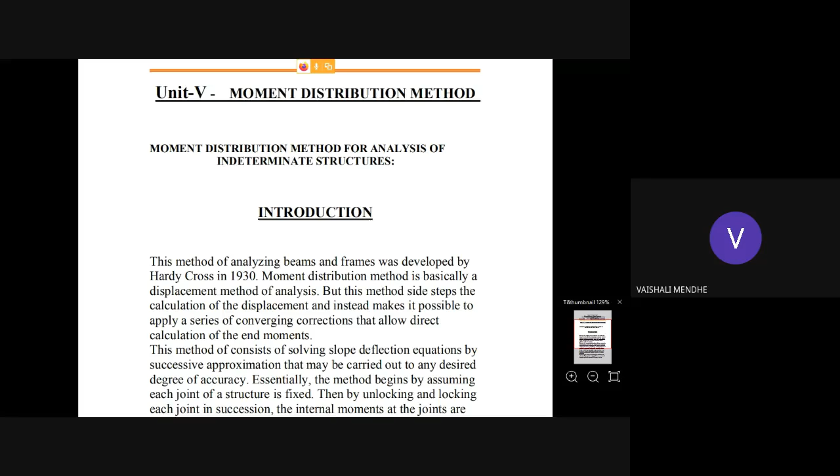I'll just go with the introduction part. You already know the method and process of the moment distribution method; there's just an inclusion of one extra step for the sway analysis. This method is useful for analyzing beams and frames, but in this unit we are only going to study the analysis of frame.

It was developed by Hardy Cross in 1930. It is basically a displacement method of analysis, but this method sidesteps the calculation of displacement and instead makes it possible to apply a series of converging corrections that allow direct calculation of the end moment.

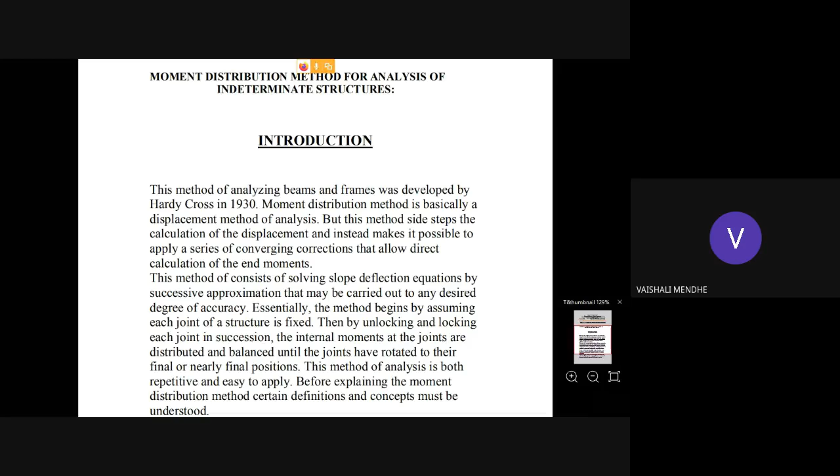We are finding out the end moments using this moment distribution method, so we can say it is a joint to joint method. This method consists of solving slope deflection equations by successive approximation that may be carried out to any desired degree of accuracy.

Essentially, the method begins by assuming each joint of the structure is fixed. Then, by unlocking and locking each joint in succession, the internal moments at the joints are distributed and balanced until the joints have rotated to their final or nearly final position.

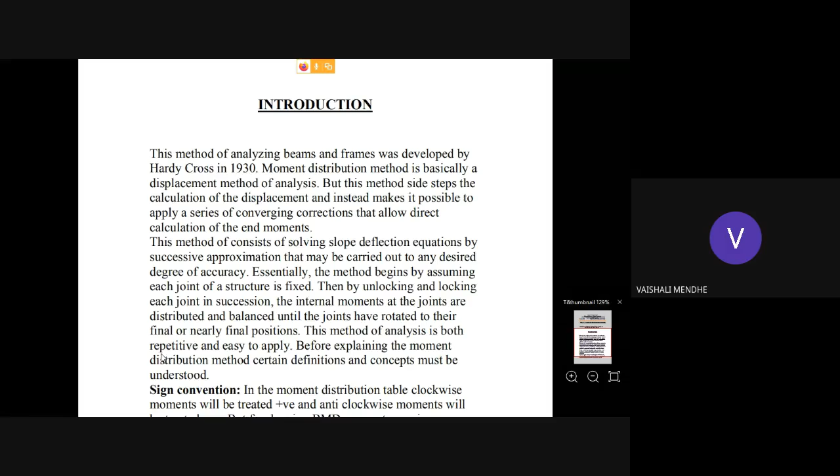So when we go to see the problems, we know the method, we know the steps, how the joint is to be balanced and how the moment is to be carried out, whether it is a hinge support or a fixed support, and accordingly we find out the final positions, meaning the final moment. This method of analysis is both repetitive and easy to apply.

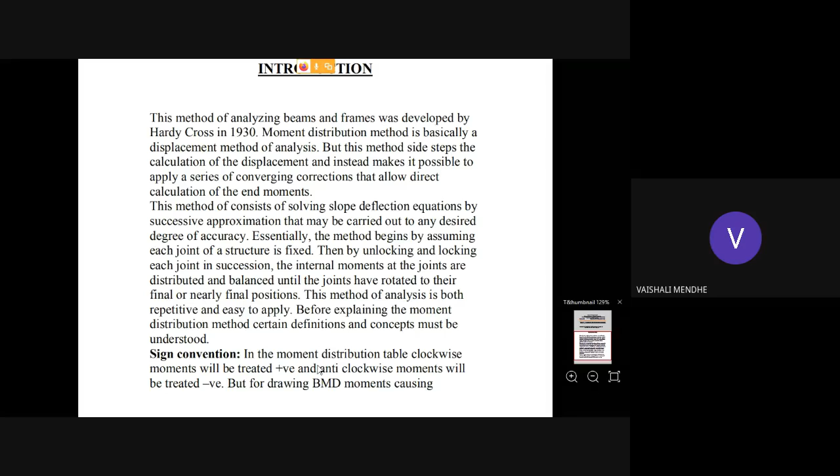Before explaining the moment distribution method, I will explain the analysis of sway frames. Certain definitions and concepts must be understood. As you know, regarding sign conventions, we consider clockwise moments as positive and anti-clockwise moments as negative.

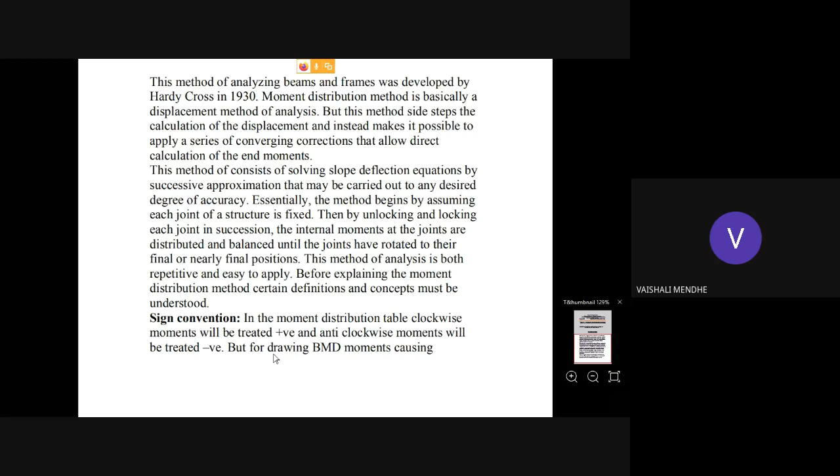This sign convention is generally used, but for drawing bending moments, causing concavity upward, that is sagging, will be treated as positive, and moment causing convexity upward, that is hogging, will be treated as negative. Again, while analyzing any structure using this method, you should know the fixed end moment.

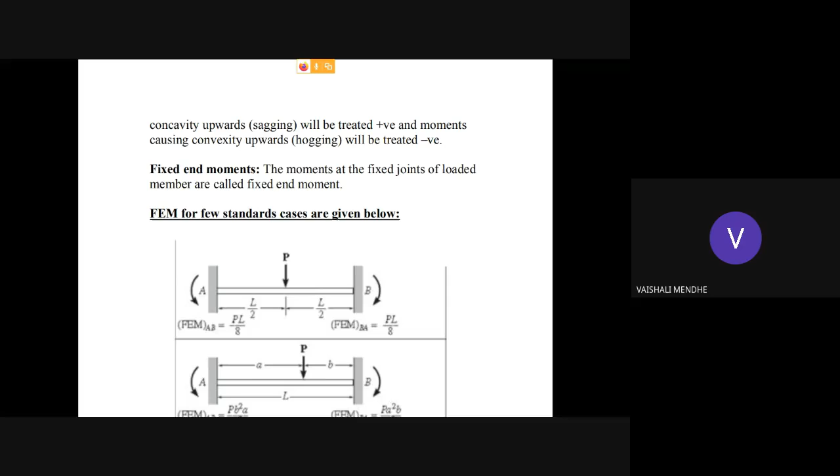So here I have listed some fixed end moments. You know the definition of fixed end moment: the moment at the fixed joints of a loaded member is called the fixed end moment. So you have some cases where you should know the fixed end moment for that case.

For some standard cases, if the load is acting exactly at the center, if the load is not at the center, if there is a uniformly distributed load, if there is a varying load - because when we solve problems of frames or beams, there may be any type of loading. So every time we carry out the analysis of any structure using this method, the first step is always to find out the fixed end moment of your members.

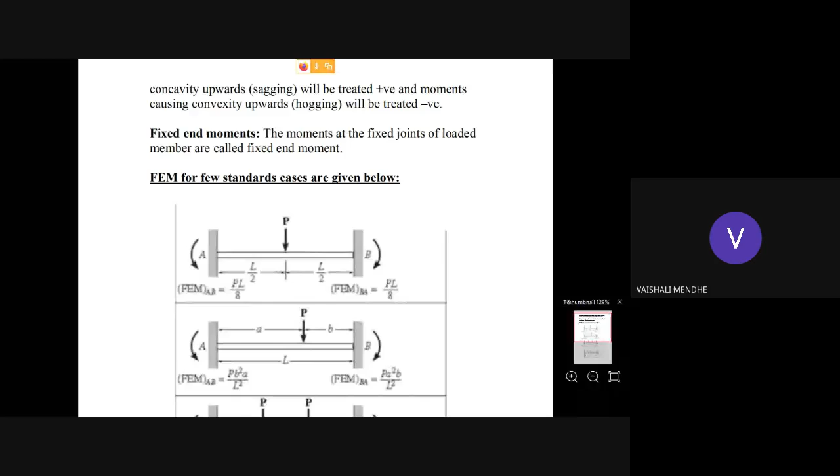That depends upon which type of loading is acting on your structure. So here I have given the fixed end moment for some standard cases, and you are very much familiar with this, you know this.

Okay, only you have to learn this, to find out the fixed end moment of any member. So here you can see that load is exactly at the center.

So fixed end moment AB is anti-clockwise and fixed end moment BA is clockwise. Anti-clockwise we are considering minus and clockwise we are considering plus. So this is minus PL by 8, plus PL by 8.

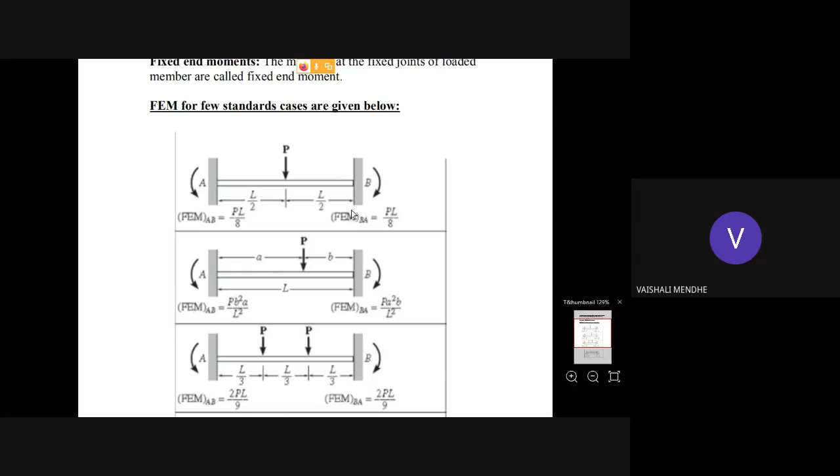Okay, so some few cases I have listed here. Here you can see that load is not acting at the center. So fixed end moment AB is WAB square by L square, and WA square B by L square.

If there are 2 loads at the center, you can use this formula: 2PL by 9 minus, and this is plus 2PL by 9. Or you can go with fixed end moment AB WA square B square by L square plus WAB square by L square, and fixed end moment BA WA square B by L square plus WA square B by L square, like that you can do it.

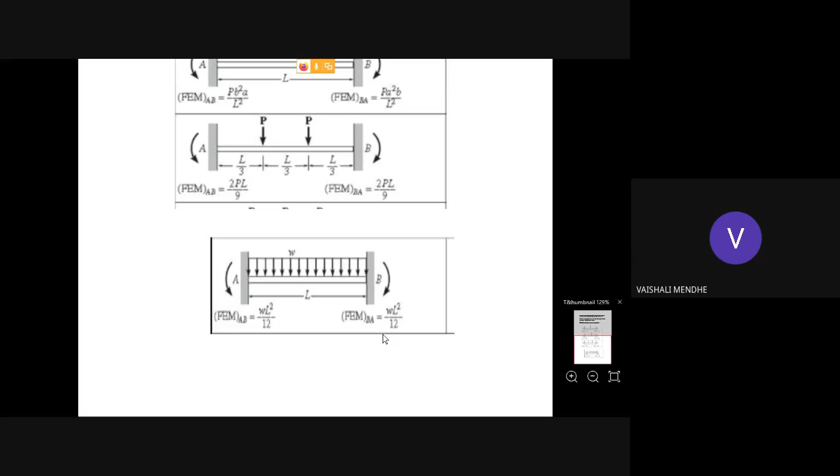Or if there is a uniformly distributed load, you can see it is WL square by 12, WL square by 12, minus plus. Then there may be this type of loading also on your structure, uniformly varying load.

So this fixed end moment AB is minus WL square by 20, and fixed end moment BA is WL square by 30. And for the last case, this is also the uniformly varying load.

So here you can see the fixed end moment AB is 5 WL square by 96, and fixed end moment BA, it is plus, and AB is minus.

So these are some of the cases you have to keep in mind for finding out the fixed end moment. Generally there will be point load, uniformly distributed load, uniformly varying load also, and also there will be moment at the end A, or at the center also. That I have not included here.

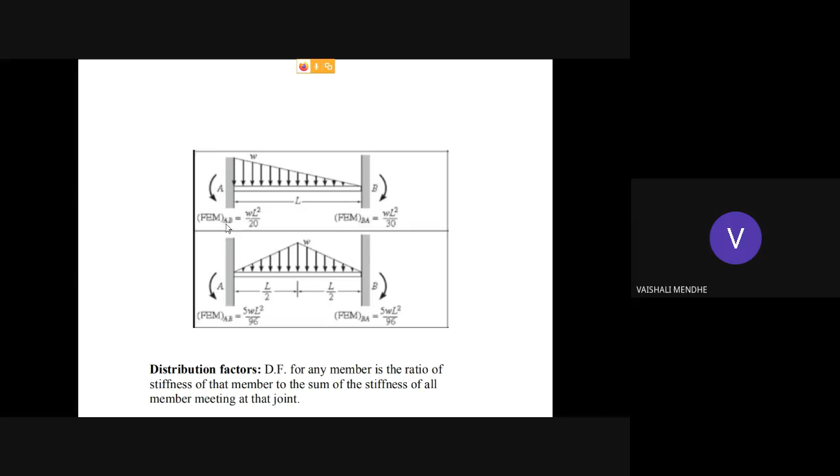But you can search it from any book, or from the net, and just write down that if there is a clockwise moment at A or B, or an anti-clockwise moment, then what will be the fixed end moment AB and fixed end moment BA.

So then I am going to repeat these things because already you know this method and you know about the distribution factor and the stiffness factor, so I'll not focus more on this. Just I will tell you how the distribution factor is to be calculated and how the stiffness factor is to be calculated, because this distribution factor is based on the relative stiffness factor.

So this distribution factor for any member is the ratio of stiffness of that member to the sum of the stiffnesses of all the members meeting at that joint. So we are considering the joints, and at the joints how many members are connected to that joint, we are just adding that, we'll get the summation K.

So this K in general, the distribution factor, it is equal to K by summation K. So this formula you have to keep in mind, that is K by summation K. K is the relative stiffness of that particular member, and summation K is the sum of the stiffness of all the members meeting at that joint. Whatever members are connected to that joint, you will just add the stiffness, so that will give you the value of summation K.

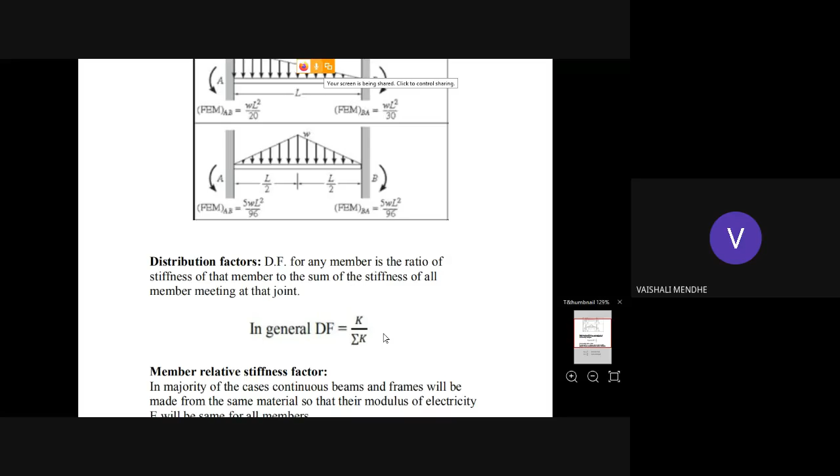So this formula also you have to keep in mind, K by summation K, and the distribution factor addition of this is always equal to 1. Then the relative stiffness factor is denoted by K.

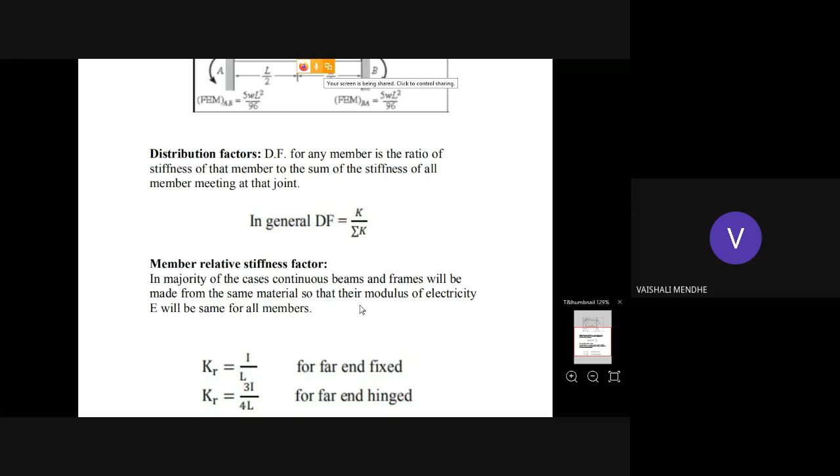In majority of the cases, continuous beams and frames will be made from the same material, so their modulus of elasticity E will be same for all the members. This also you have to keep in mind, that if the end of the member is fixed, K can be calculated as I by L.

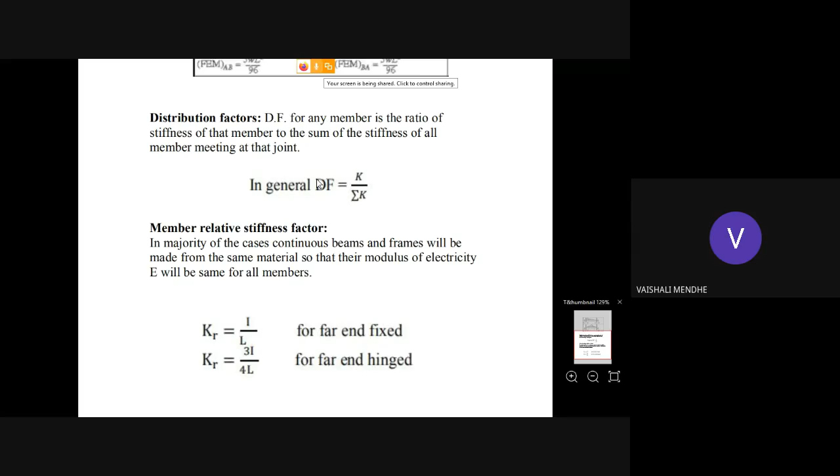Okay, it is calculated by I divided by L, where I is the moment of inertia. If the far end is hinge or roller supported, or continuous, and for fixed end, K will be considered as I by L. For hinge end or roller supported, K will be considered as 3 by 4 into I by L. So these two formulas you need to keep in mind to calculate the relative stiffness factors, which is denoted by K. Once you get this value of K, then you can find out the distribution factor. So these are the terms we are going to use in this moment distribution process.

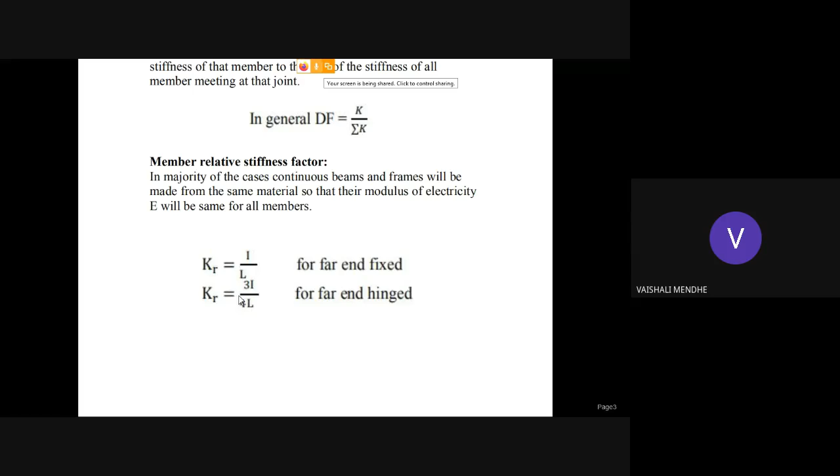So you just try and understand about the sway frame. What exactly is the sway frame? It is sway frame, or we can say it is a side sway. So how this moment distribution method is applied for frames with side sway, that analysis how it is to be carried out, we will see one by one. First of all, you just understand the meaning of the sway frame.

Frames that are not symmetrical with reference to material property or geometry, like different lengths and the I values of the column. If the I values are different and the length is different, material property is also different, and which is non-symmetrical, or support conditions are not same, length is different, or subjected to non-symmetrical loading, meaning loading will not exactly be at the center of your member.

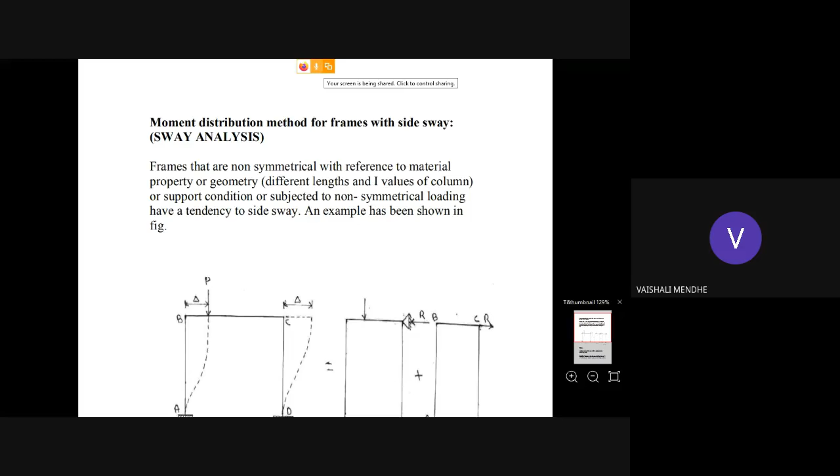So these are all the properties we can say that will make the frame a sway frame. Length can be different, I values of column can be different, support conditions also different, or the main thing is that if the loading is subjected to non-symmetric loading, which has a tendency to side sway, that is called a sway frame.

So this example I have given here, you can see this figure. An example has been shown in this figure. In first figure 1a, you can see that the frame is there where the end conditions are same, column lengths are same, but you can see here this load P is not a symmetric load. We can say P is acting at 1 meter from B and 3 meters from C. It is not exactly symmetric force.

So that also will be the responsible factor for the frame to have a sway. There will be a sway as the load is applied - there may be vertical loading also, or there may be horizontal loading also. So you can see this force P, it is not symmetric. Due to that unsymmetric loading, there will be chances of sway frame.

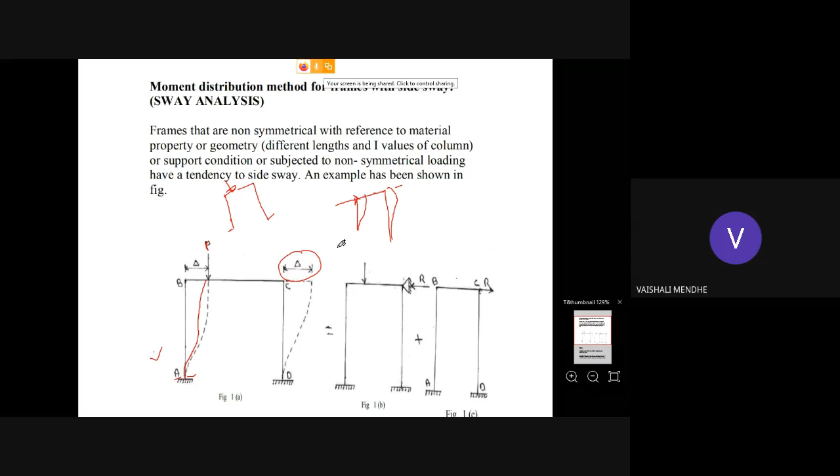So first of all, you should understand the concept of how it is to be solved.

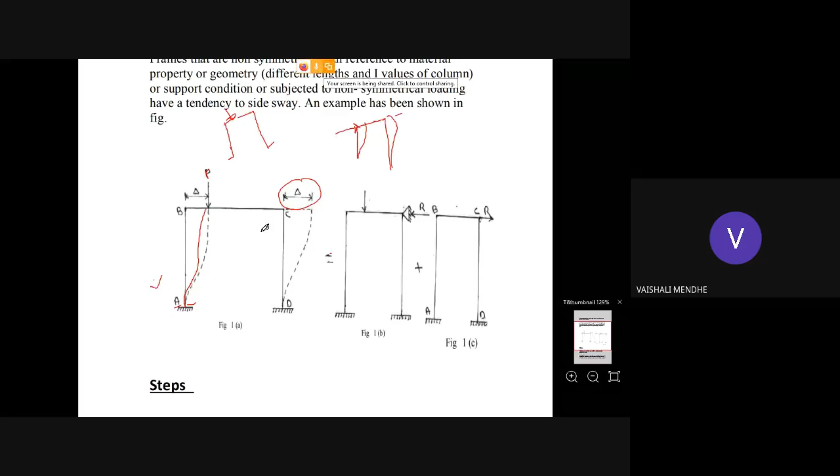Analysis of such frames will be carried out in two ways. First, the actual frame will get divided into two frames. The first analysis will be carried out as a non-sway analysis, and the second will be carried out as a sway analysis. First I will explain how the analysis is to be carried out, and then I will move to the figure to show how it is divided into two parts.

We can see that the analysis of such frames means sway frames. Whatever analysis we carry out in this unit, we are going to carry out only frame analysis, and only considering the sway frame. We are not considering the non-sway frame, because non-sway frame analysis is very simple. What extra do we have to learn in this subject? We have to analyze the sway frame using this method.

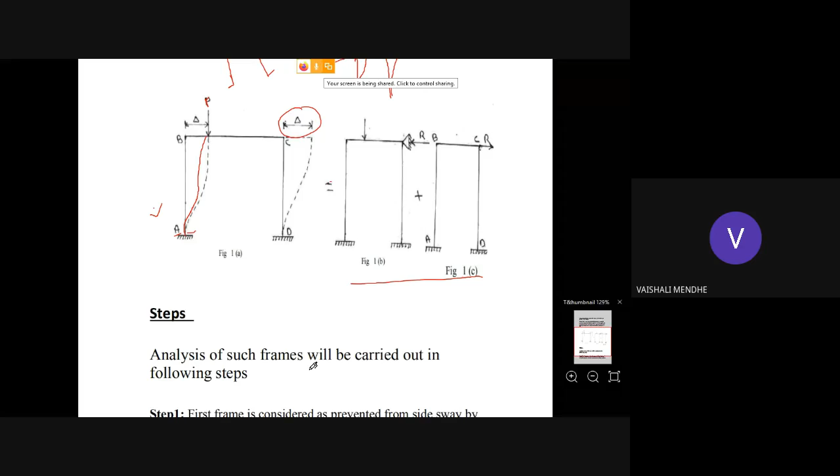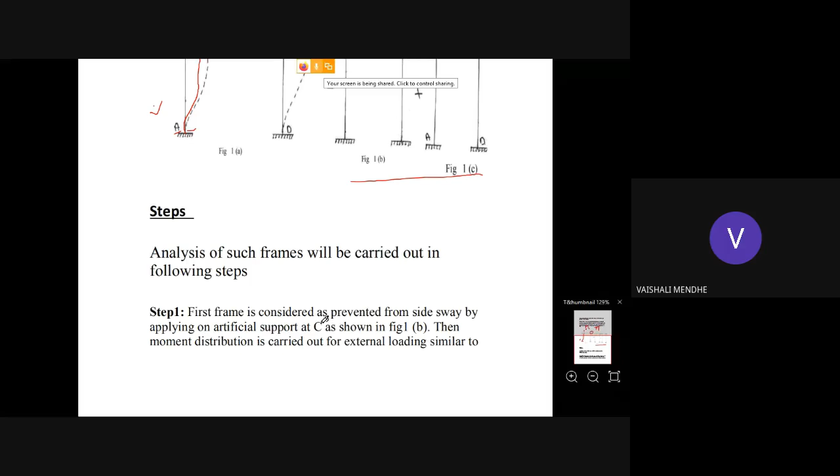So analysis of such a frame will be carried out in the following steps. Just try to understand the steps. First, step 1: the frame is considered as prevented from side sway by applying an artificial support at C as shown in figure 1b. You can see this figure. First, the frame is prevented from side sway.

Whatever the actual frame given to you, that will be your sway frame, and the external loading will act on that frame. But as we have to analyze this frame as a sway frame, first you have to carry out the non-sway analysis, then you have to carry out the sway analysis.

So the final moment you will get is your non-sway moment plus sway moment, and to that sway moment we are applying a correction factor, because non-sway analysis is carried out only for the external loading. Whatever external load is acting on the frame, only for that the non-sway analysis is carried out. But sway means displacement. How much displacement are we assuming? We are assuming delta.

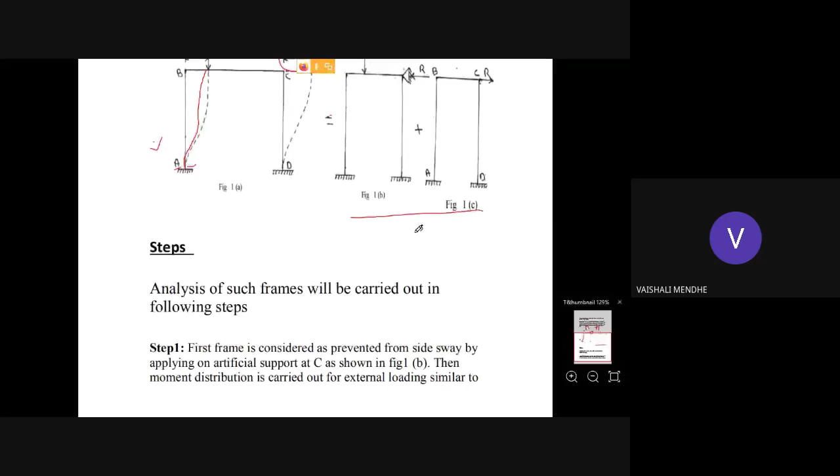Both these effects will not be considered together. We cannot consider the external loading plus displacement together. So in what way is it to be analyzed? First, we are considering the actual frame as a non-sway frame. Then how will we consider it? Because the frame is a sway frame.

As you can see here, this is the actual frame, and this actual frame is to be divided into two parts. So your first frame will become a non-sway frame. First frame will be non-sway frame, but actually the frame is a sway frame. But when it becomes a non-sway frame, we have to prevent this frame from sway by providing the artificial support at this level, at C.

As you know, a non-sway frame means if there is an artificial support at the beam level, the frame is called a non-sway frame. So as the frame is a sway frame, first we have to go for the non-sway analysis, considering the actual frame as a non-sway frame by applying the artificial support at C as shown in figure 1b. If we provide this artificial support at C, the frame will be prevented from sway.

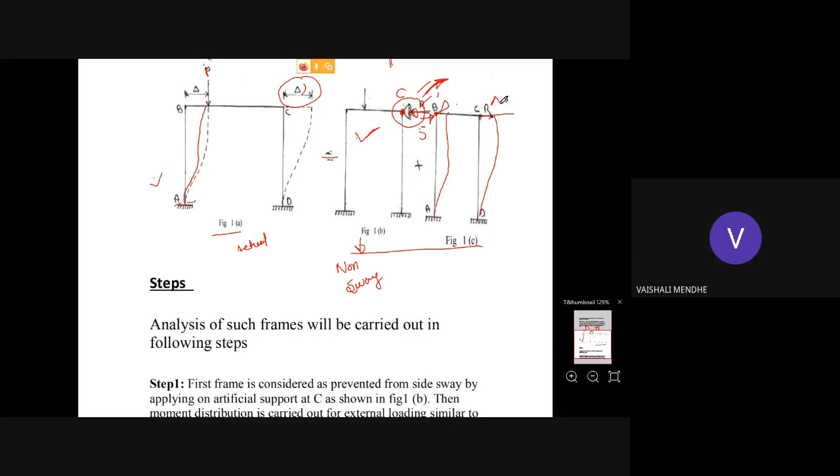Again, I have shown that figure after this. So due to this, force will be developed at C, equal in magnitude but opposite in direction, and due to this force the frame will get deflected by an amount of delta. Okay, so this will become your sway frame. This will be your sway frame. So analysis of this frame will be carried out by considering this displacement effect.

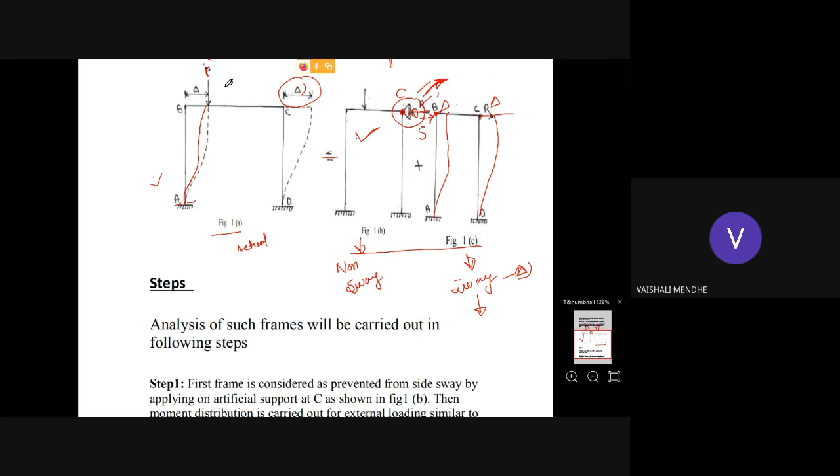So the thing is that whatever the actual frame is given to you, that frame is going to be divided into two parts. First will be your non-sway frame, second will be your sway frame. Okay, so just you should see here in step 1, first the frame is considered as prevented from side sway by applying an artificial support at C.

Okay, why we are providing the artificial support, that I told you now, because we have to prevent the sway। Because सिर्फ अपने को लोडिंग इफेक्ट के लिए एनालिसिस करना है, उसको बोलते हैं नॉन स्वे एनालिसिस। तो फ्रेम को अपने को नॉन स्वे फ्रेम बनाना है, इसीलिए अपने वहां पे अपन ने एक सपोर्ट प्रोवाइड किया है। देन द मोमेंट डिस्ट्रीब्यूशन इज कैरिड आउट फॉर एक्सटर्नल लोडिंग

similar to non-sway frame as you have done in SA1, okay, called as non-sway analysis, same as non-sway frame। उसको अपन ने non-sway frame बना दिया एक सपोर्ट प्रोवाइड करके, तो आपको वैसे कैरी आउट करना है। कैसे कैरी आउट करोगे? स्टेप 1 होंगी फिक्स्ड एंड मोमेंट, स्टेप 2 होंगी डिस्ट्रीब्यूशन फैक्टर, फिर अपन थर्ड स्टेप होंगी नॉन स्वे मोमेंट डिस्ट्रीब्यूशन टेबल बनाएंगे, ओके, दैट और अपन नॉन स्वे मोमेंट फाइंड आउट करेंगे, ओके।

सो देन बाय यूजिंग स्टैटिक्स मींस इक्विलिब्रियम कंडीशन, रिस्ट्रेनिंग फोर्स, जो मैंने आपको रिस्ट्रेनिंग फोर्स आपको यहाँ पे बताया है, as we are providing the artificial support, this is your restraining force which is denoted by S, okay। So that restraining force, it is called a non-sway force, so that is to be determined by considering the horizontal equilibrium of the frame, that is summation fx is equal to 0। क्योंकि सपोर्ट अपन बीम लेवल पे प्रोवाइड कर रहे हैं तो हॉरिजॉन्टल फोर्स डेवलप्ड होगा, इसीलिए कंडीशन ऑफ इक्विलिब्रियम we will use as summation fx equal to 0 for entire frame। तो at the time of taking the problem ये आपको समझ में आ जाएगा, तो वहां से अपना नॉन स्वे फोर्स निकालेंगे।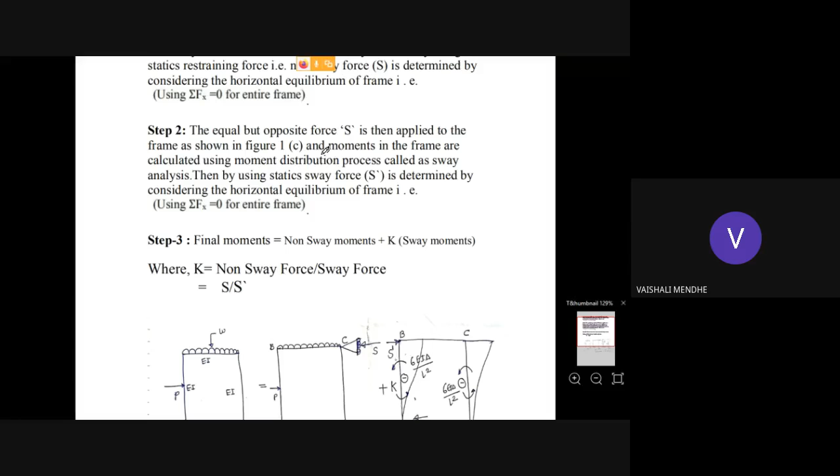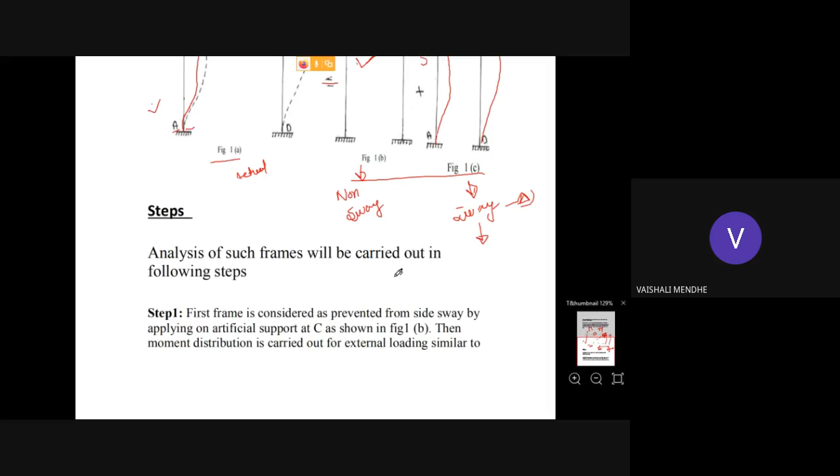उसके बाद स्टेप 2, the equal but opposite force S dash is then applied to the frame as shown in figure 1c। You can see that equal but opposite force I have denoted by S dash, okay। तो ये force apply होगा, okay, to that frame, due to that there will be moment developed due to displacement। So as you know that if there is a displacement at any one end of the member, here you can see that there is a displacement at this end, okay, the moment developed at both the ends of the member, it is 6EI delta by L square at both the ends of the member, okay, that is minus, and there is only the displacement of the column, there is no displacement in the beam level। Why?

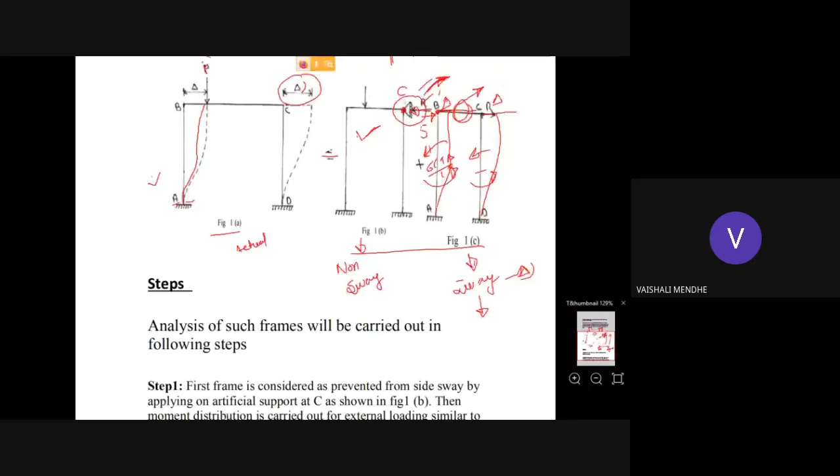Because both legs are vertical legs, there is no inclined leg, so there is only displacement in the column member, no displacement in the beam member, so no moment will be developed in the beam. Only moment is developed at AB and CD, fixed end moment AB, BA. So we will consider this fixed end moment for the analysis and carry out the moment distribution process.

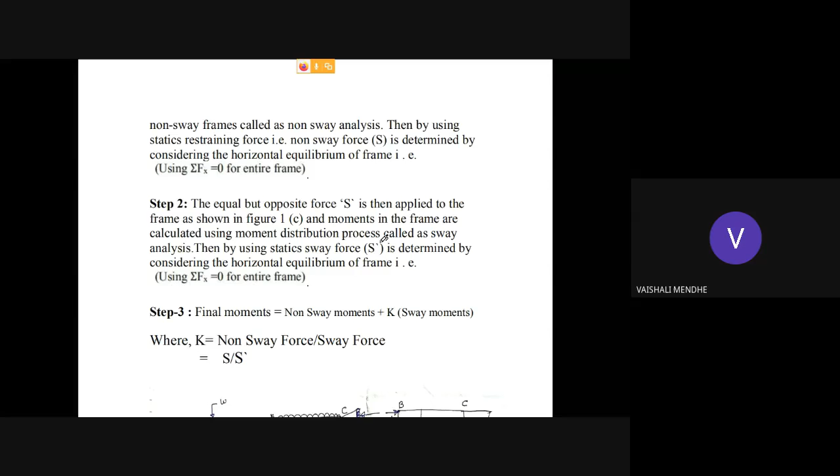Then by using statics we will find out the sway force S dash by again considering the equilibrium of the frame, that is summation Fx equal to 0. So for the entire frame you have to use this equation and find out the sway force.

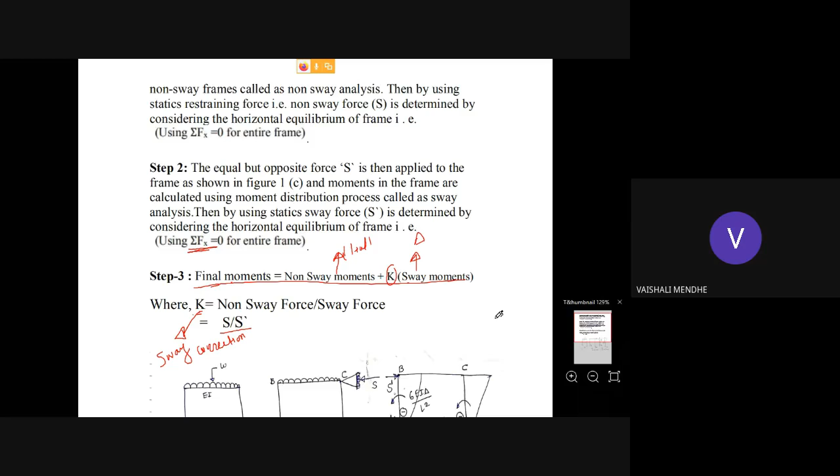Again, in this figure I have shown this actual frame. You can see the type of loading here, there may be any type of loading. Here I have shown it is UDL, and this load is exactly at the center, but end conditions are the same, though length of the column is different. So again this frame will be a sway frame.

Okay, so you just need to keep in mind what factors will the sway frame depend on. That may be your end condition, that may be the material property, I value may change, unsymmetrical loading, okay, and the different length of the column.

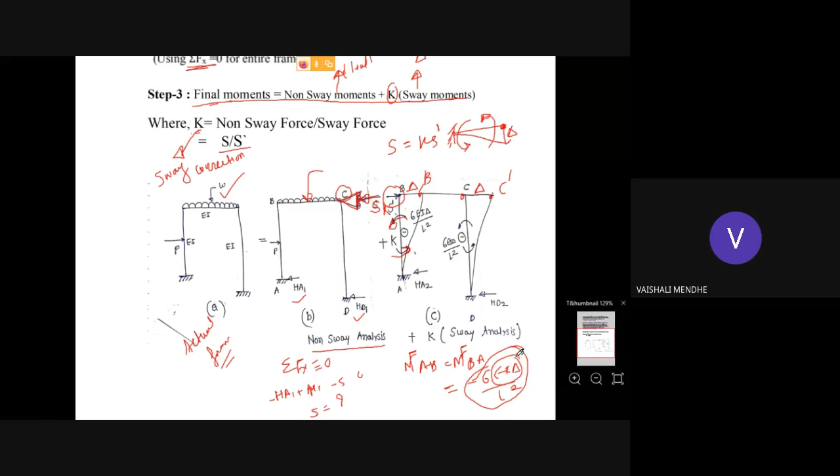Okay, that depends on you, because whatever the sway moments you get will be the assumed moment, multiply it by K and that becomes your corrected moment, that's why correction is always to be applied to the sway moment. Okay, so that K factor can be different, because if you see various types of books, okay, the EI delta value is assumed in different ways, so the K factor, the correction you get, can be different.

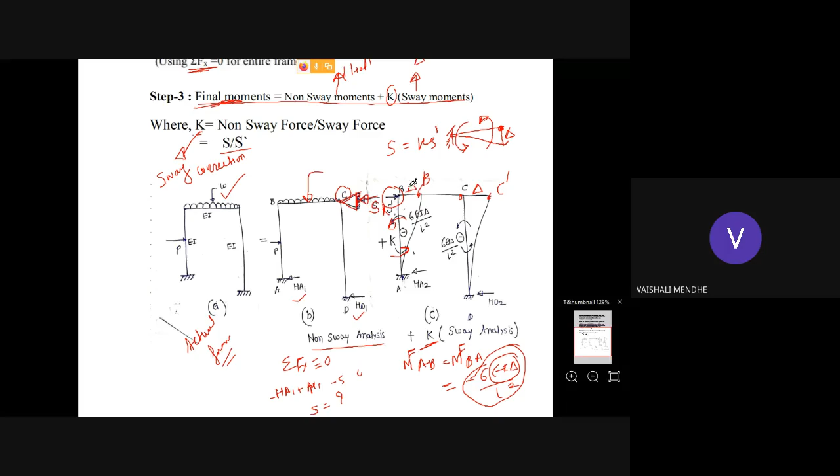ओके, HA2 HD2 वो अपन देखेंगे कैसे उसको कैलकुलेट करते हैं. तो वहां से आपको S डैश मिलेगा, फिर अपन K की वैल्यू निकालेंगे S बाय S डैश, और उसके बाद विल फाइंड आउट द फाइनल. सो दिस इज द वे हाउ वी आर गोइंग टू एनालाइज द sway frame using these 3 steps.

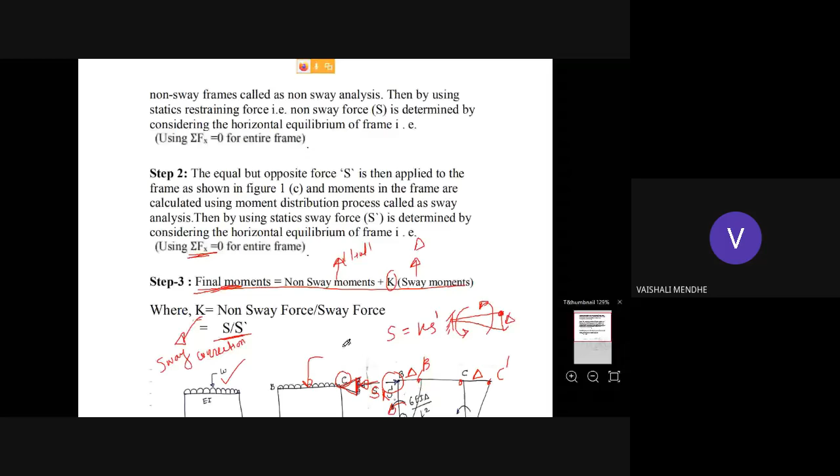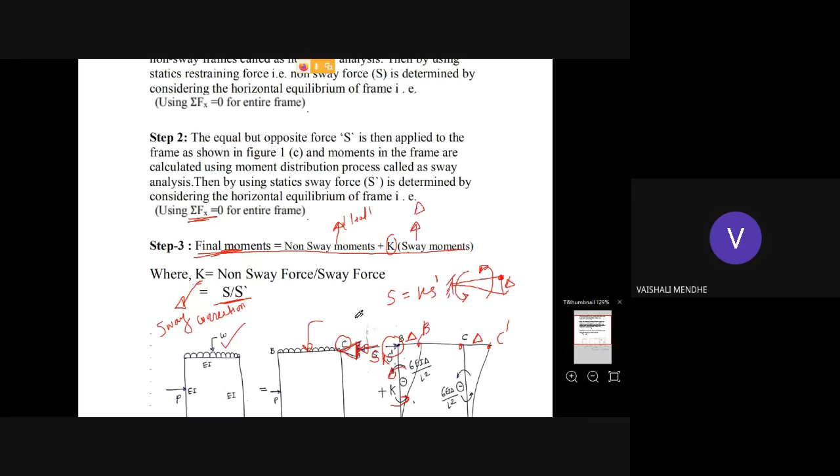ठीक है, तो अभी जैसे जैसे अपन प्रॉब्लम्स लेंगे कल से, ठीक है, तो जैसे प्रॉब्लम अपन सॉल्व करेंगे, आपको अगर आप वो कॉपी में लिखते हो, सिर्फ आपको सुनना नहीं है, कैलकुलेटर लेके बैठना है, कॉपी लेके बैठना है, और साथ में मेरे साथ करना है यहाँ पर. ठीक है, सिर्फ देखने से कुछ नहीं होता. तो यहाँ पे

एक मैं समराइज कर रही हूँ, अभी यहाँ पे मैंने स्टेप्स नहीं लिखे, तो अगर आपको स्टेप्स लिखना है, अगर आपके पास स्टेप्स है तो आप प्रॉब्लम को इजीली सॉल्व कर सकते हो। तो पहली स्टेप जो रहेगी, ओके, इसमें पहली स्टेप रहेगी ऑलवेज टू फाइंड आउट द फिक्स्ड एंड मोमेंट। ठीक है, ये पहला पार्ट रहेगा आपका नॉन स्वे एनालिसिस का। नॉन स्वे एनालिसिस में पहला पार्ट रहेगा नॉन स्वे, दूसरा पार्ट रहेगा स्वे एनालिसिस। ठीक है, तो नॉन स्वे एनालिसिस में पहले फिक्स्ड एंड मोमेंट निकालेंगे। ओके, ओनली लोडिंग इफेक्टिव, मतलब लोड की वजह से जो फिक्स्ड एंड मोमेंट है। सेकेंड स्टेप होती है डिस्ट्रीब्यूशन फैक्टर। थर्ड स्टेप रहेगा मोमेंट डिस्ट्रीब्यूशन टेबल।

मोमेंट डिस्ट्रीब्यूशन टेबल, ये आपकी थर्ड स्टेप है। उसके बाद फोर्थ स्टेप रहेगी आपकी, आपको नॉन स्वे फोर्स निकालना पड़ेगा। ओके, मोमेंट डिस्ट्रीब्यूशन टेबल में आपको नॉन स्वे मोमेंट मिल जाएगा, उसके बाद नॉन स्वे फोर्स। उसके बाद बी पार्ट जो रहेगा वो रहेगा आपका स्वे एनालिसिस। स्वे एनालिसिस में फिर से आपको फिक्स्ड मोमेंट निकालने पड़ेंगे, डेल्टा की वजह से जो फिक्स्ड मोमेंट मिल रहा है। सेकेंड आपका डिस्ट्रीब्यूशन फैक्टर तो ऑलरेडी कैलकुलेटेड किए हैं, वो वही रहेंगे। उसके बाद आपको स्वे मोमेंट डिस्ट्रीब्यूशन टेबल बनाना पड़ेगा, यहां से आपको स्वे मोमेंट्स मिलेंगे। उसके बाद थर्ड रहेगा आपको स्वे फोर्स निकालना पड़ेगा। ओके, स्वे फोर्स निकालने के लिए आपको इक्विलिब्रियम ऑफ द फ्रेम कंसिडर करके स्वे फोर्स, उसके बाद अपन निकालेंगे करेक्शन फैक्टर s by s dash, and then we'll get the final moment.

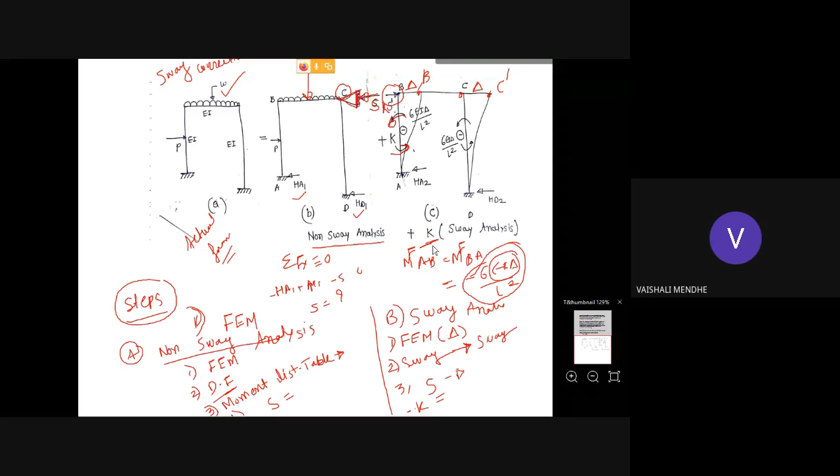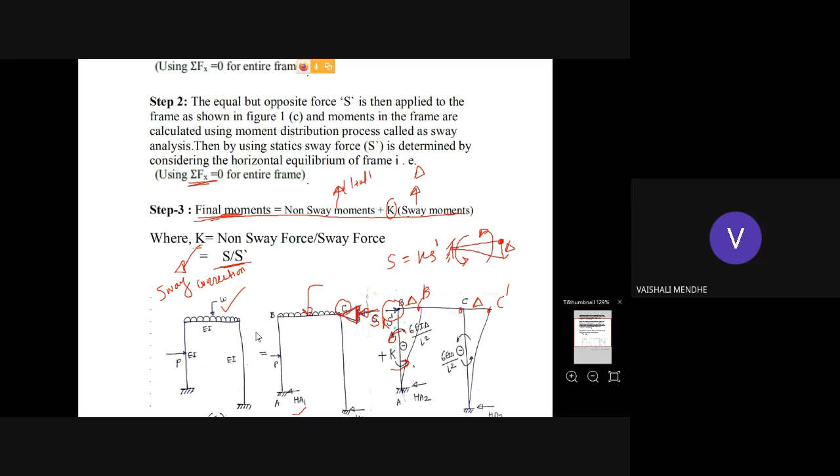Okay, so these are the steps you have to follow, and accordingly you have to do the analysis. Okay, so is there any doubt? समझ में आया आपको? एटलीस्ट इसको कैसे, प्रोसेस को कैसे कैरी आउट किया जाता है, या फिर स्वे फ्रेम का एनालिसिस कैसे किया जाता है, इतना समझ में आया? फिगर से आपको आई थिंक समझ में आया होगा। सो एट द टाइम ऑफ सॉल्विंग द प्रॉब्लम्स जो भी आपके डाउट्स है वो क्लियर है, लेकिन आई वांट टू आस्क यू दैट वेदर यू गॉट द कंसेप्ट और नॉट।

यहाँ पे दो एनालिसिस अपने को करना है, वो आपको ध्यान में रखना है। एक तो नॉन स्वे एनालिसिस और एक स्वे। दो मोमेंट डिस्ट्रीब्यूशन टेबल यहाँ पे बनेंगे, मतलब यहाँ पे इट विल रिक्वायर मोर टाइम कंपेयर टू द नॉन स्वे फ्रेम। ओके, सो ये फिगर से आई थिंक आपको समझ में आया होगा कि व्हाई वी आर डूइंग द सेपरेट एनालिसिस, बिकॉज लोडिंग एंड डिस्प्लेसमेंट इज नॉट considered simultaneously.